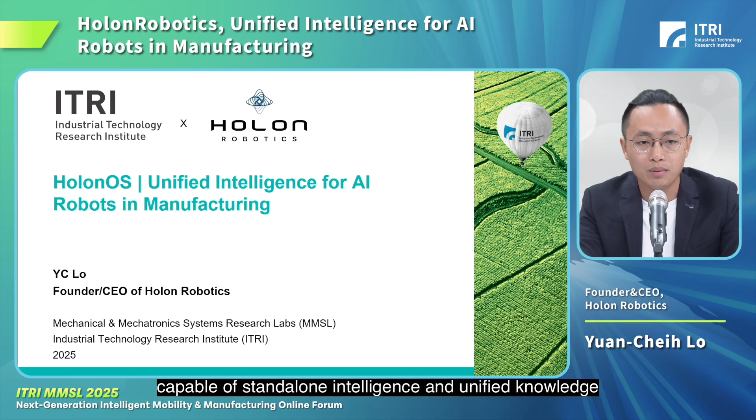Imagine a future where the robot is not just a tool, but an intelligent partner, one entity that can continuously learn and self-evolve. Hi, I'm YC, the CEO and founder of HolonRobotics. We are building the first AI robotic software capable of standalone intelligence and unified knowledge.

HolonRobotics is a software company. We preserve industrial knowledge through AI. We preserve manufacturing knowledge through automation by unifying AI, robot, and sensors, making intelligent manufacturing a reality. We have 7 experts across robotics R&D, finance, marketing, and operation, combining technical depth with business execution. After 4 years incubating in ITRI, we officially spun off this year and closed a 0.5 million angel round.

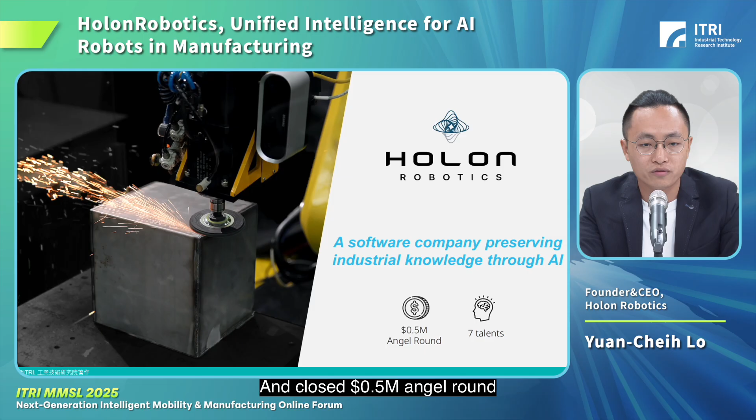As labor shortage is serious and happening around the world, in manufacturing, companies lose up to 10 million in revenue when their senior engineer retires or exits. In metal processing, it's much more urgent. The median worker age is 51, the highest among 80 other industries.

So, after 30 years of automation, what's holding it back? 3 reasons. Industrial robots have been limited to mass production, requiring specialized expertise, complex programming, and manual adjustment. First, hard to learn. Manufacturers need at least 2 years to train a robotics engineer, making skilled labor a major barrier. It's especially difficult because we are facing a labor shortage issue. Once they leave, the knowledge goes with them.

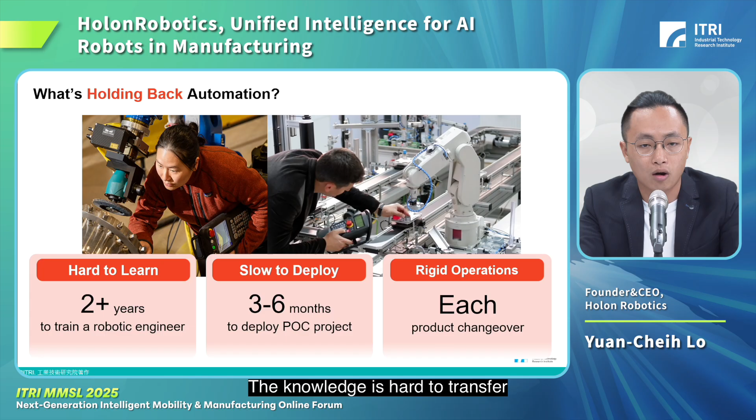Second, time-consuming. Developing, testing, and validating a robotics automation project takes 3 to 6 months to ensure production feasibility, making the process highly time-consuming. Third, rigid. Even after deploying the robotics automation in production, every changeover needs manual reteaching and adjustment. The knowledge is hard to transfer, making robotics hard to use in today's fast-changing manufacturing needs.

So, we envision the robot not as a tool, but an intelligent, self-evolving partner. That's why we built an AI-driven operating software with a human-in-the-loop approach. It allows the robot to learn directly from the operators and turn the experience into intelligence. We make robots that don't just do tasks, they understand how to do tasks.

To do that, we simplify the process to save 85% of the time. Meanwhile, our solution can continuously learn from the operator's experience. Eventually, this will lead to a 30% boost in productivity.

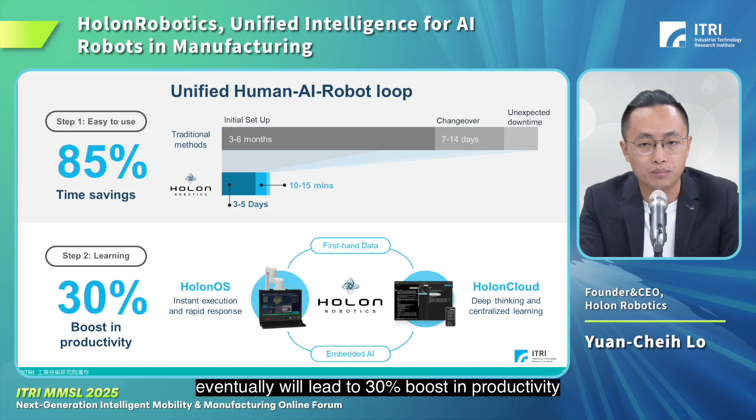To achieve these 2 goals, we designed two products for each purpose. We built 2 integrated products, HolonOS and HolonCloud. The idea is like iOS and iCloud working together. HolonOS, the control panel, is a complete hardware and software solution designed for instant execution and rapid response for robots and sensors. HolonCloud is a cloud-based platform for deep thinking and centralized learning, enhanced AI-driven for robotics and sensors.

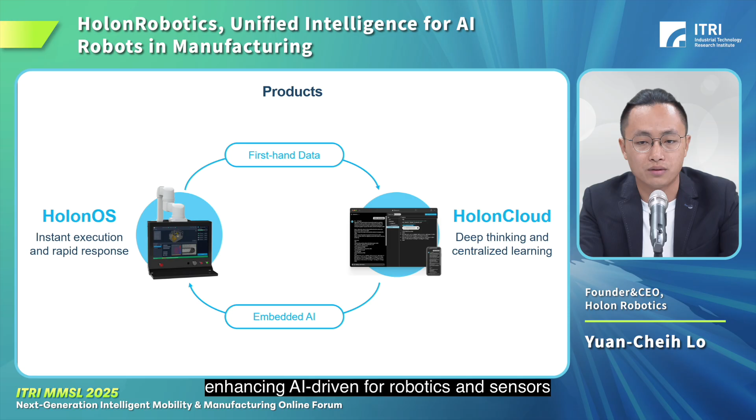HolonOS, an edge AI control panel, featured first with unified interface. It eliminates sensor and robot integration time. It supports leading robot brands like FANUC, ABB, Yaskawa, KUKA, and Mitsubishi. It integrates 2D vision, 3D vision, laser line scanning for sensors, active force control, PLC, and I/O modules, all to save integration time.

Second, a CAD-Free Path Generation engine with just 3 simple steps: scan, path generation, and deploy. Simply place the workpiece and the 3D scan automatically senses its geometry. The user can interactively adjust and generate the robot path. Seamlessly deploy in a unified interface, eliminating the need for a CAD model or manual teaching.

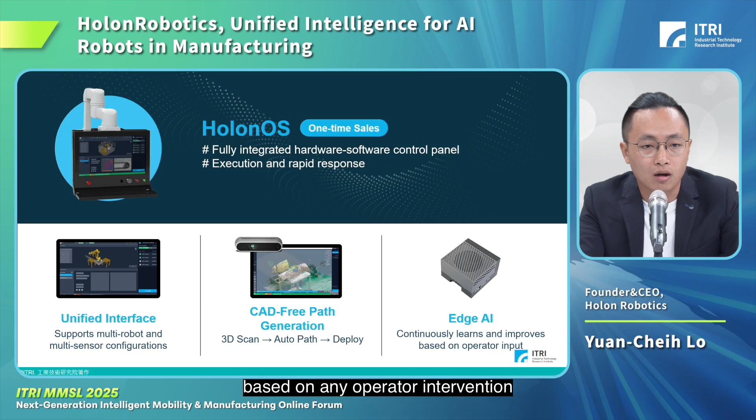Last, edge AI. That's how our HolonOS can learn and improve directly from first-hand data, based on any operator intervention, making the robot actually learn from the human.

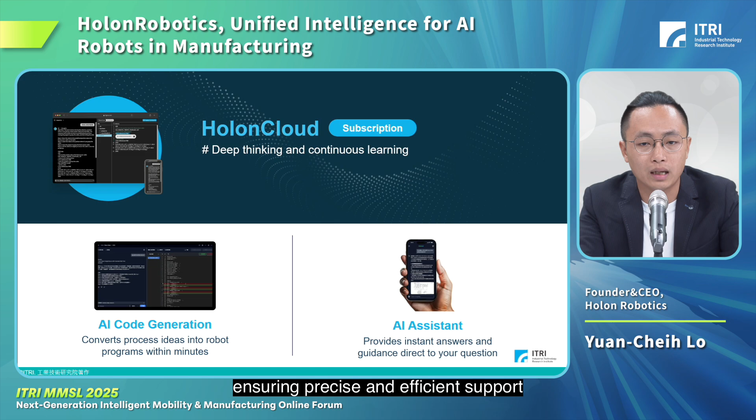HolonCloud, a deep thinking and learning service, AI code generation. Generate the robot code from the process idea in minutes, saving programming time. It creates accurate robot programs based on process requirements. It also acts as an AI assistant, answering technical questions instantly. It's embedded with system knowledge, including maintenance manuals, operation guides, mechanical and electrical diagrams, ensuring precision and efficient support, saving troubleshooting time.

Our go-to-market strategy is simple and clear. We directly bring value to the end user to save time and increase productivity. We collaborate with system integrators to accelerate deployment and amplify word of mouth. Once we achieve product market fit, we will scale through distributors and key suppliers to build a global sales network and scale rapidly.

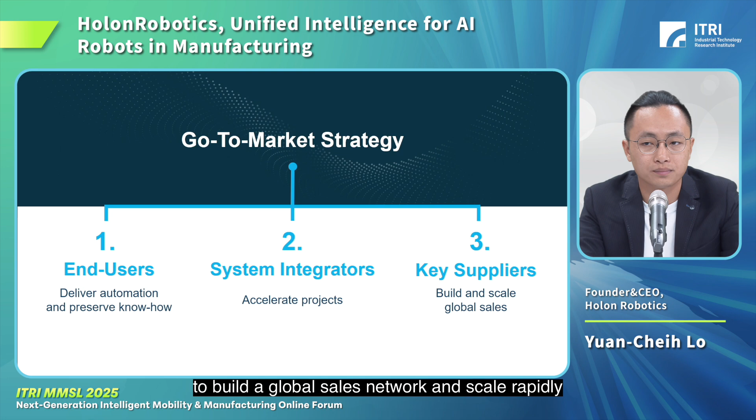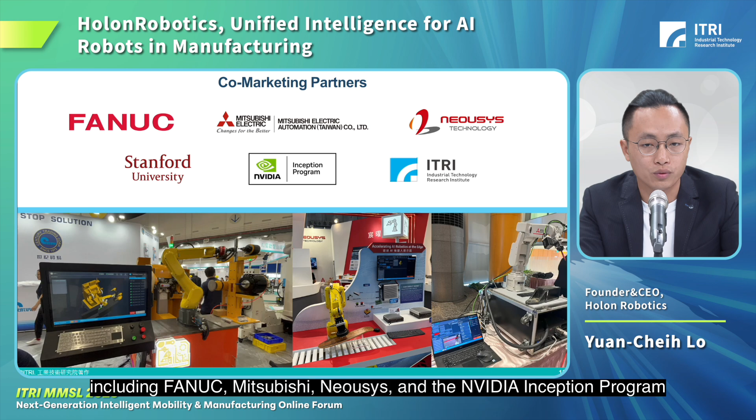Today, HolonRobotics has delivered 15 successful cases across 9 industries, with $800,000 in revenue, in medical, cutlery, defense and grinding, one of the largest cutlery and heavy machinery manufacturers, and a kitchenware company. Also, we co-market with industrial leaders, including FANUC, Mitsubishi, Neousys, and the NVIDIA inception program.

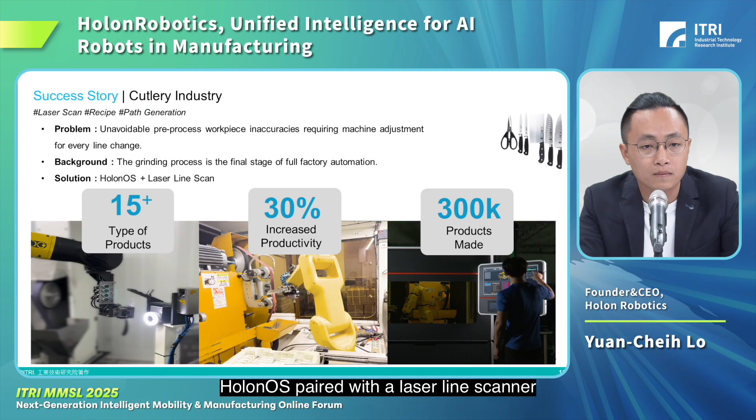One of our success stories is in the cutlery industry. Changeover in cutlery manufacturing is a real headache. Parts are never perfect, usually meaning tedious manual adjustment because of unavoidable preprocessed workpiece differences. HolonOS, paired with a laser line scanner, automatically measures each workpiece's geometry and generates the exact grinding path, removing setup time. Now the customer can swap between 15+ product types on the same line and has already processed over 300,000 parts with a 30% productivity increase.

The same issue happened in the motorcycle and fitness bike industry. For the unavoidable preprocessed workpiece difference, HolonOS with laser line scanning captures each part's dimension and auto-generates a precision grinding and polishing path, cutting setup time to minutes. The intuitive parameter interface turns complex adjustment into a few clicks, ensuring smooth production and consistent quality.

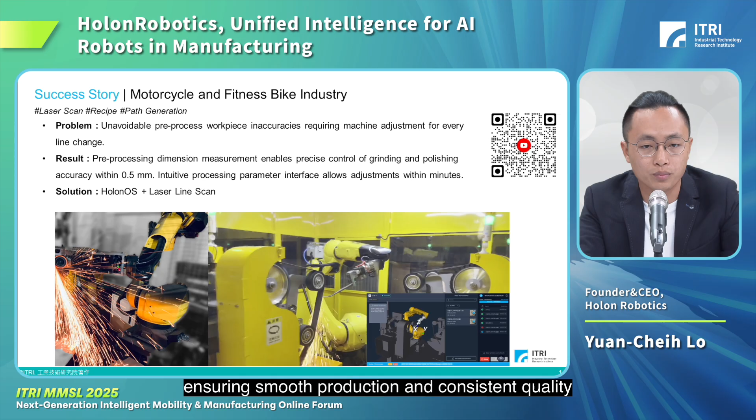So if you're excited about a future where robots should not just be a tool, but actually an intelligent partner, we'd love to connect.